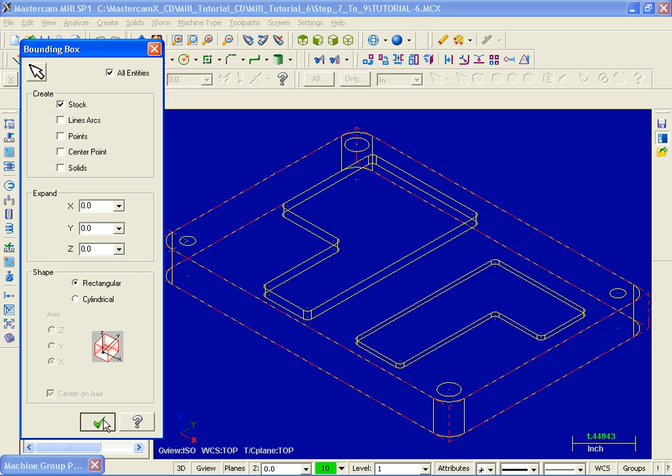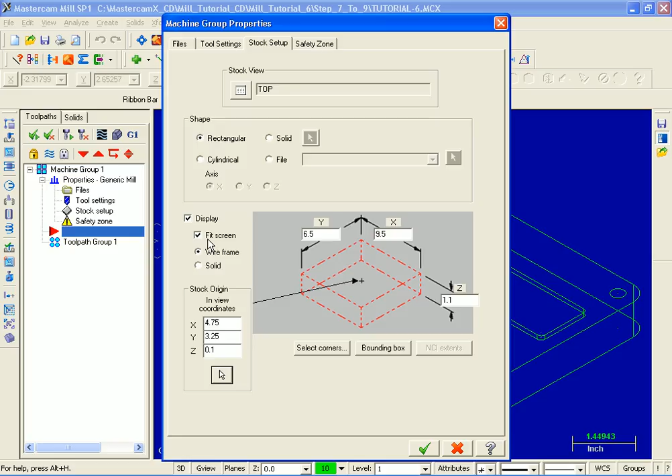As you can see the X, Y and Z has been input for us. What I'm going to do is change the Z from an inch to 1.1. The X and Y are going to stay as is. Moving over to the left in the stock origin I'm also going to change the Z value to 0.1. Display and fit screen are turned on, so everything looks good here. Let's move on up now into tool settings.

Over on the left in the feed calculation area you can see it's been calculated from tool. Over on the right for tool configuration I'm going to check assign tool numbers sequentially and also check warn of duplicate tool numbers. Moving on down to the advanced options I'm going to check override defaults with modal values and also check clearance, retract and the feed plane. Moving over to the right the sequence numbers I'm going to start at 1 and move up in increments of 1.

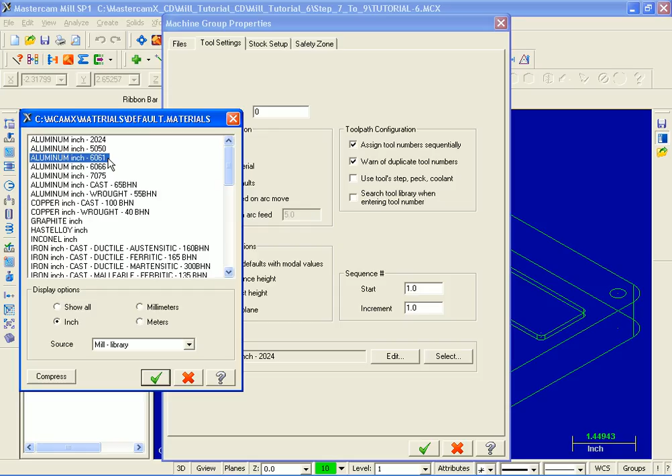Now the material at present is aluminum inch 2024. I'm going to change that. I'm going to pick select. Now at the bottom of this dialog box in the source section I'm going to open up this drop down and pick library, and then from this list I'm going to select aluminum inch 6061 and then pick OK. Everything looks great here. I'm going to pick OK, and as you can see the red dashed lines represent our stock. I'm going to move on up and get a top view and also do a fit.

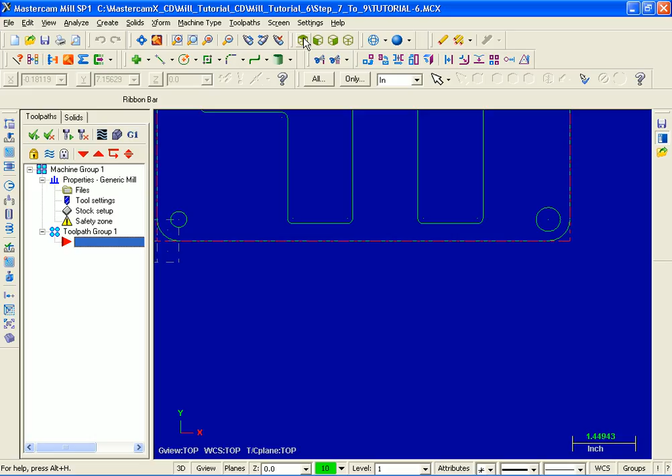Let's now move on to step 8. We're going to face the top of this part. I'm going to pick toolpaths and then move on down and pick face toolpath. Now if you look at the prompt on the right hand side it says select OK to use defined stock or select chain 1. Well, I'd like to use the stock, so I'm going to move over to the left in the chaining dialog box and just pick OK.

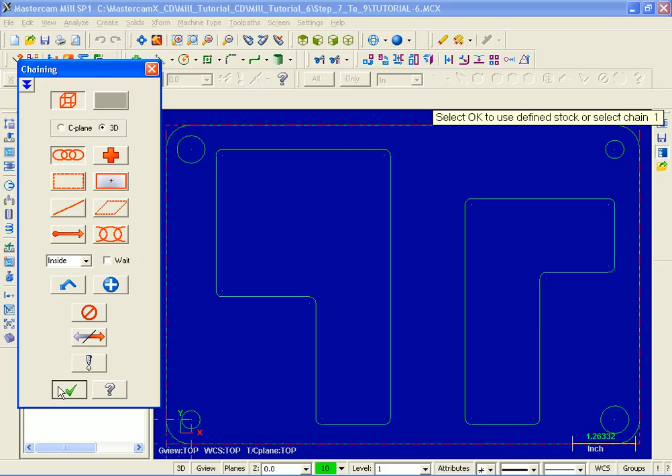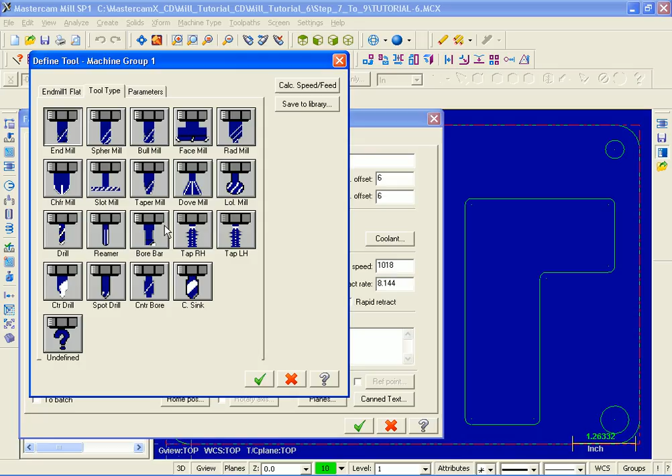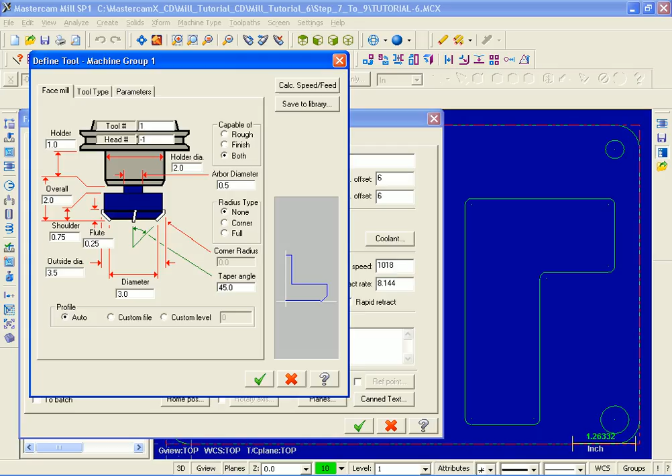We're going to be using a face mill and we're going to create one from scratch. So over in the white area I'm going to right mouse click and then select create new tool. Now we're creating a face mill, so I'm going to click on the face mill icon. Now, in this section that dimensions this tool, I'm going to change a couple of things. For the diameter, I'm going to change it to 3.0, and then moving on to the left for the outside diameter, I'm going to change that to 3.5 and hit enter. So everything looks good here. Next, I'm going to move over to parameters.

Now, the first thing I'm going to do here is change the feed rate. I'm going to input 20 inches a minute for the feed rate. For the plunge rate, I'm going to slow that down to 10 inches. And for the retract, I'm going to take it back to 20 inches a minute. For the spindle speed, I'm going to set that at 200 RPM. The tool name, I'm going to input 3-inch face mill. Everything looks good here.

If I move over to the top right hand corner, you can see Save to Library. I'm going to click on this button, and what this will do is save this information in this file name, mill inch. I'm going to pick Save, I'm going to pick OK, and I can use this tool in other jobs that I work on. Otherwise, the tool will be available just for this current job.

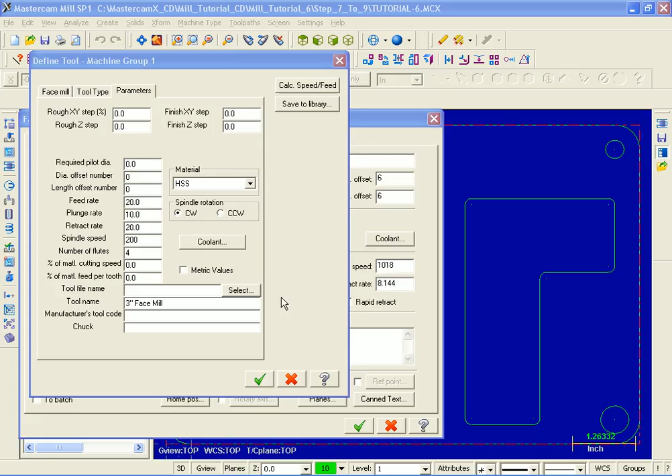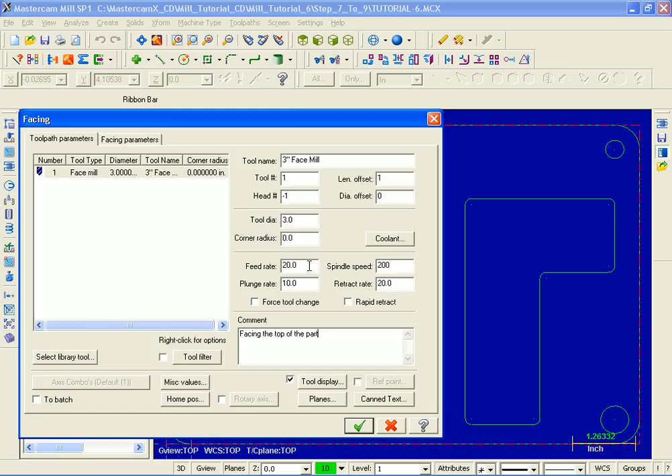And everything looks great here. I'm going to move down the bottom and hit OK. So we've set up the tool. This is tool number 1. I'm going to change the length offset to 1, and let's update the comment. Facing the top of the part. So everything looks good on this page. As you can see, feed rate, plunge rate has been taken from the information that we put in earlier on for the tool. Let's move over to facing parameters.

Starting at the top, I'm going to turn on the clearance in absolute. It's set to 2, so that's good. Moving on down, retract is in absolute at 0.25, that's good. The feed plane is incremental at 0.1, that's going to stay as is. Top of stock is in absolute 0.1, good. And the depth, I'm going to leave it in absolute at Z0. So that looks good. I'm just going to move over to the right and move between cuts. I'm going to change that to linear, a linear move. Everything looks good here. I'm going to pick OK.

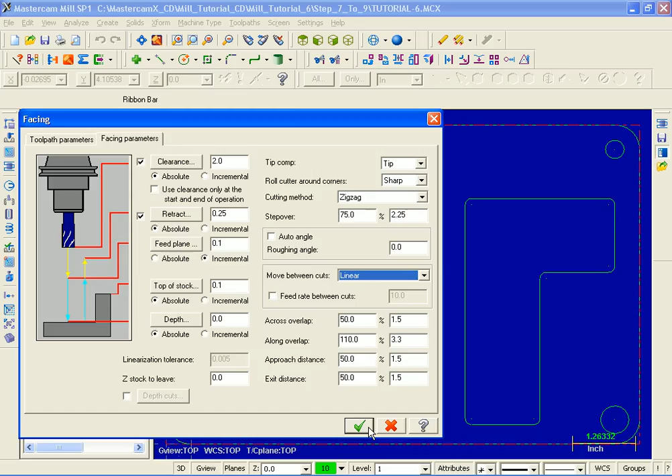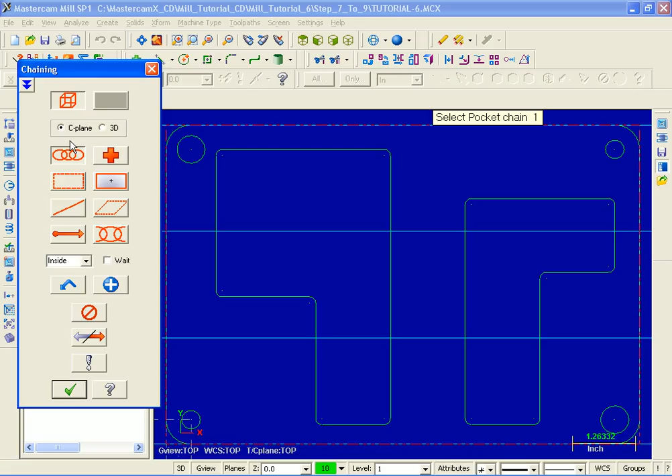So we've successfully faced the top of the part. Let's move on now and rough out the 2 pockets. I'm going to go into Toolpaths and then pick Pocket Toolpath. Over on the left in the chaining dialog box, I'm going to enable C-plane. What this will do is chain only entities that are parallel to the current construction plane and at the same Z depth as the first entity in the chain that I pick. What I'm going to do now is move on up and get an isometric view.

Now the prompt, select pocket chain 1. What I'm going to do is pick this entity that's at the bottom of the pocket on the left. Now select pocket chain 2. What I'm going to do is move over to the right pocket and pick this entity that's lying at the bottom of this pocket. So we've picked both the chains in these pockets. So I'm going to move back to the chaining dialog box and pick OK at the bottom.

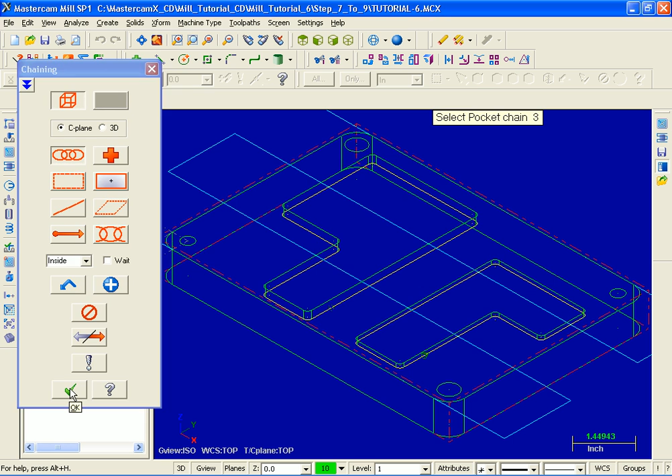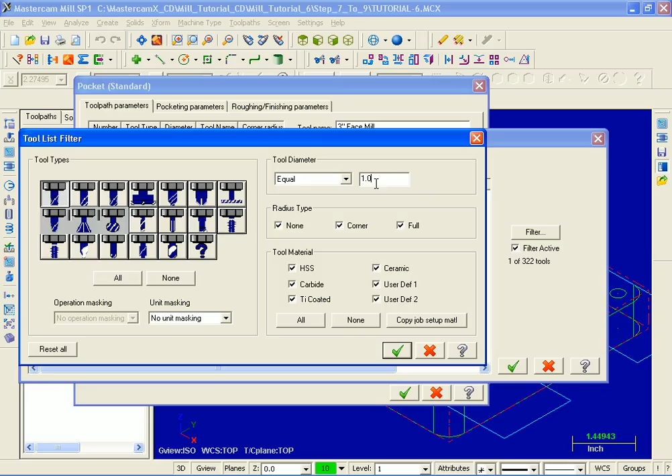Now we need to select a tool. So what I'm going to do is pick on Select Library Tool, and I'm going to use the filter. Now moving over in the tool type section, I'm going to pick None, and then next I'm going to move up and hit the icon for flat end mills. Now moving over to the right in the tool diameter section, I've got it set to equal, and what I'm looking for is a 1-inch diameter cutter. So I've input 1.0, everything looks good here. Next I'm going to pick OK, and as you can see I've successfully filtered out a 1-inch flat end mill. I've selected it. I'm now going to move down and pick OK.

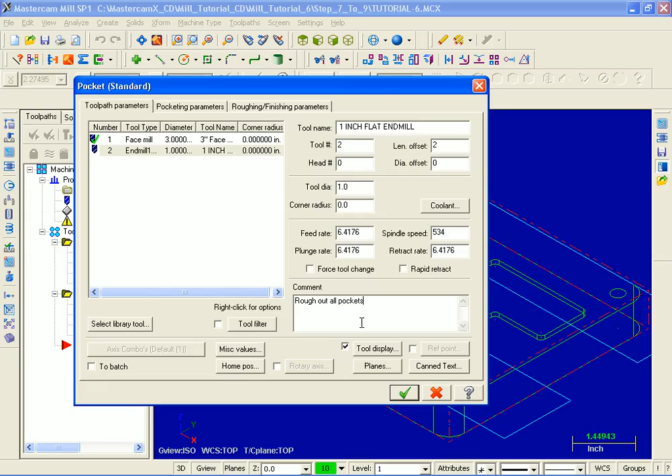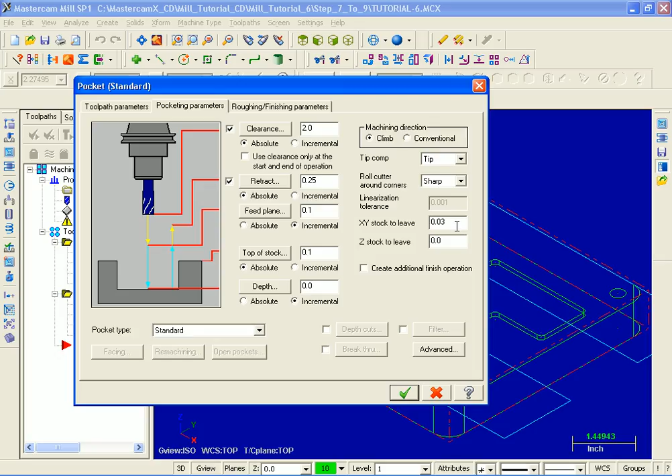This is tool number 2. Length offset, I'm going to change that to 2. Moving on down in the comment section, rough out all pockets. So everything looks good here. Let's move on to the next page, pocketing parameters. Clearance, retract, feed plane, top of stock, everything looks good. For the depth, I'm going to change that to incremental and leave it at 0. Now, this is a roughing operation. XY stock to leave, I'm going to set that to 0.03, 30 thou. So we're going to leave 30 thou on the walls of this pocket. Everything looks great here. Let's move over to roughing, finishing parameters.

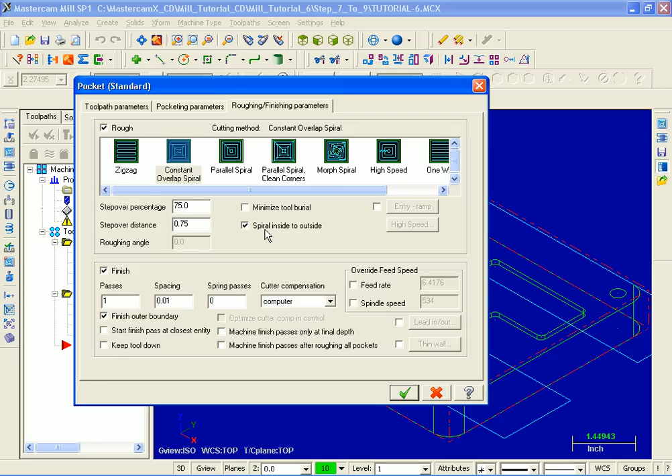At present, the cutting method is zigzag. I'm going to change it to constant overlap spiral. Moving on down, I'm going to uncheck minimize tool burial, and I'm going to keep checked spiral inside to outside. So it's going to start machining out this pocket in the center and then working its way out. I'm also going to move on down and disable finish. So everything looks good here. I'm going to pick OK.

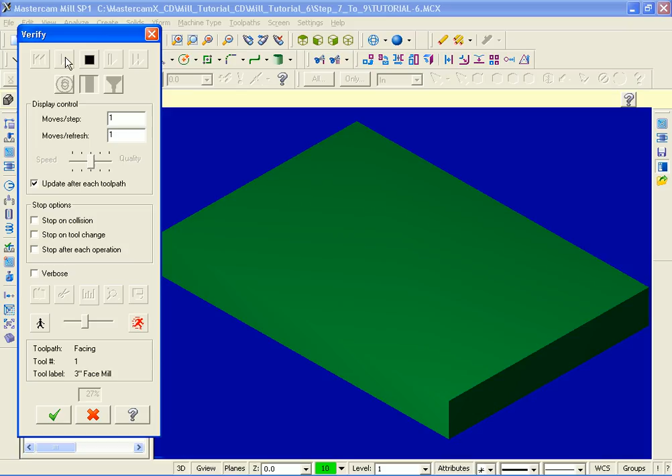And there's our pocket. Let's verify the two toolpaths that we've just completed. I'm going to move over and pick select all operations. I'm going to move over to the right now and pick verify. I'm just going to slide this verify dialog box up. I'm going to slow the speed down and move on up and hit the machine button. So there's our facing operation, and up next is our 1-inch diameter end mill, and this is a roughing operation, and we're leaving 30 thou on the walls of this pocket. I'm going to pick OK, and that completes this video.